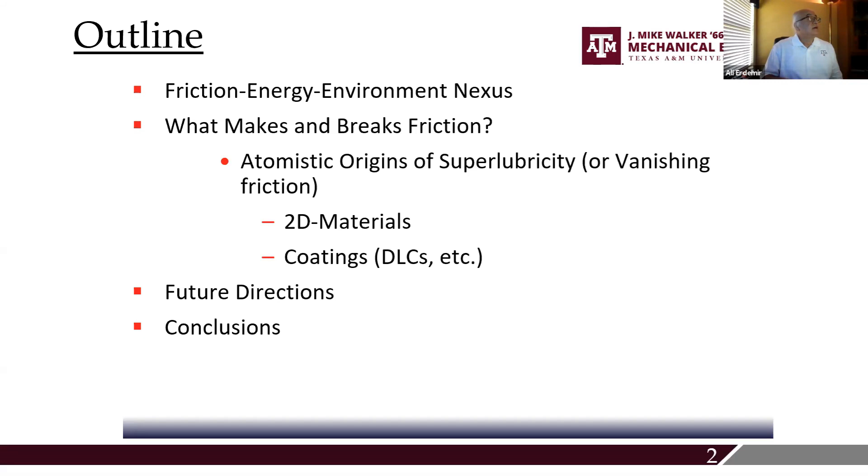So friction, as you all know, is known as resistance to sliding. And we feel it, we live with friction every day. We hardly make a big deal about it, but it's part of our daily life.

As I mentioned, despite being part of our life, it is one of the least understood physical phenomena. We are doing all we can with all these computational capabilities to understand the root causes of friction at atomistic level, and we are making progress. But have we actually fully understood it? I doubt so. It's going to be with us for quite a while longer.

And it is very important for safety, safe walking. A few weeks ago, we had a big snowstorm here down in Texas, and it crippled life, and everything almost came to a halt. It caused major damage. People fell down, actually fractured their legs. I have a friend at the university who had major surgery because of a fractured hip. So it's due to friction, or lack of it.

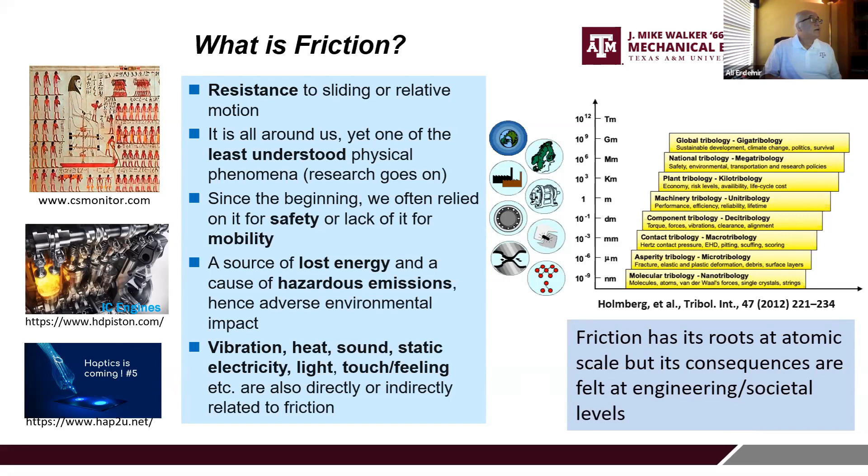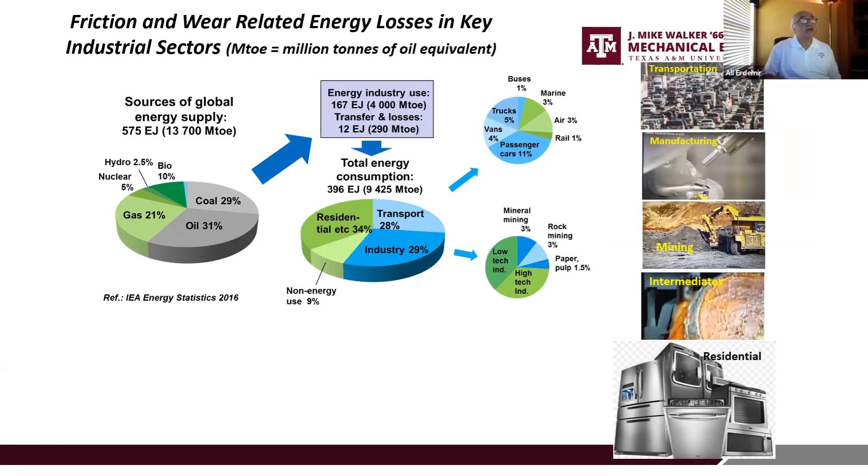If you go to the next slide, you will see that worldwide, we produce huge amounts of energy. We need it for our industrial activities and modern lifestyle. There are so many of them. And in every one of these, there are a lot of moving parts, as you can imagine. Some of these industrial activities shown here show the fact that there are a lot of moving parts, and in every one of these, there are frictional interfaces where energy is dissipated.

And with Professor Holmberg from VTT Finland, we tried to estimate how much energy is lost to friction in all these industrial activities. And it turns out that if you combine the portion that is due to wear and material loss, friction and wear almost consumes a quarter of the global energy output. And this is quite incredible.

And collectively, these two events actually also produce 8 gigatons of CO2 emissions. I think currently total CO2 emissions are about 44 gigatons or so. So it's almost proportional. It's quite a huge amount of CO2. And this has been actually going on for very long. This accumulates in the upper atmosphere, and then we create these greenhouse gas emissions, and then we have all these weather-related or environmental related issues.

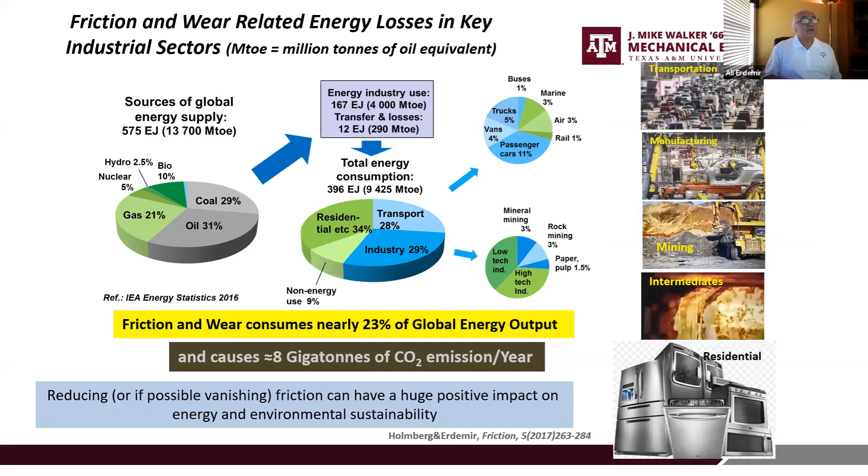There are a lot of good activities for clean energy resources, but these developments are unfortunately at a very slow pace. So if we look briefly at the situation with transportation vehicles, especially in this country, we have almost 300 million of these moving on our roads.

This way of transportation became extremely inefficient and very wasteful in terms of energy. We did a focused study with Professor Holmberg to see how much of the total energy from the fuel we put in our gas tank is actually used to move the car. It turns out that if you account for all the thermodynamic losses, air drag, and other factors, only about 20% of the total energy recovered from fuel is used to move the car. This is really unsustainable.

This had to change. Of course, nowadays there's a huge interest in switching to electric vehicles, and these are coming very strongly. Hopefully by the middle of this century, half of the vehicles on the road will be powered by electric vehicles, and I think that's a great thing.

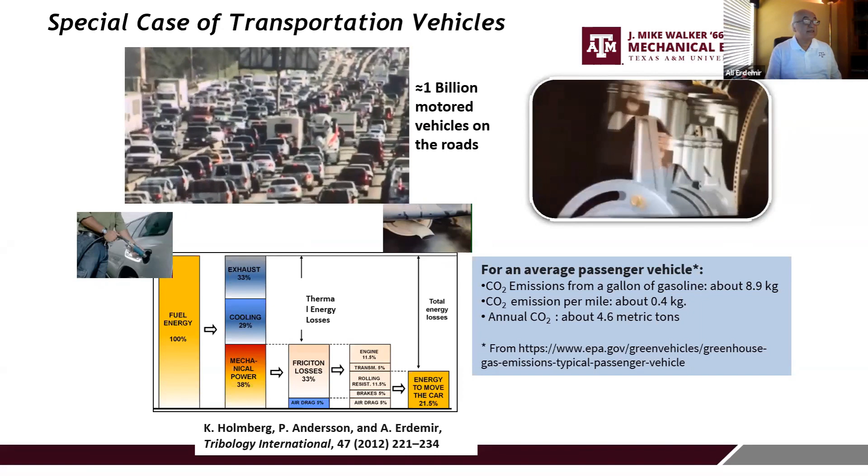In this country, every one of us, according to statistics from the EPA, drives a car and is culpable in terms of our carbon footprint. Every one of us produces almost 4.5 tons of CO2 annually. When you consider that we have over 1 billion motor vehicles, these are unbelievably high numbers. In this country we have a huge number of transportation vehicles, and collectively they are blamed for 28% of greenhouse gas emissions in 2018.

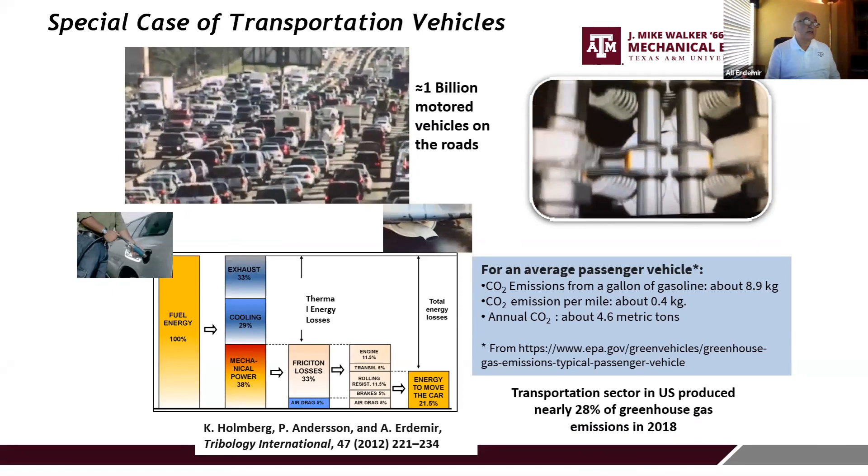So as I was saying, these numbers are not very good in terms of our future sustainability and future generations, and we have to do something about it.

With respect to electric vehicles, we did another study with Professor Holmberg which shows that if we switch to battery-powered electric vehicles, we can improve efficiency by 70%. Here we compare an internal combustion engine based vehicle versus a battery electric vehicle, and as you can see, the gain in efficiency is quite remarkable. I think this is the way to do it.

But in terms of their carbon footprint, there may not really be much difference. If we still get the power from fossil fuel burning power plants, the situation will not change. The only change is that we're shifting that carbon footprint to another source, as opposed to the cars or vehicles which at the moment are the main sources of these greenhouse gas emissions. It will instead be shifted to a coal-powered or natural gas-powered power plant. These are the kinds of things we have to be very mindful of.

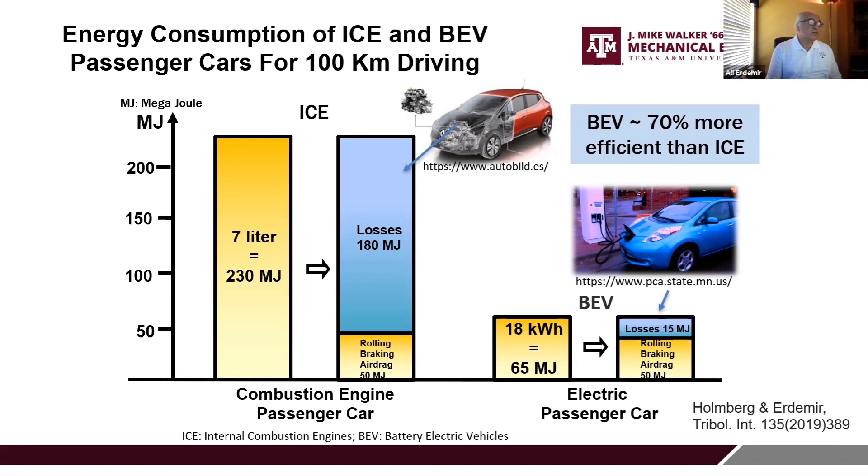So in general, if we can somehow switch to or develop technologies that will reduce frictional losses, that will have a huge impact on the environment, and also in terms of energy security and sustainability.

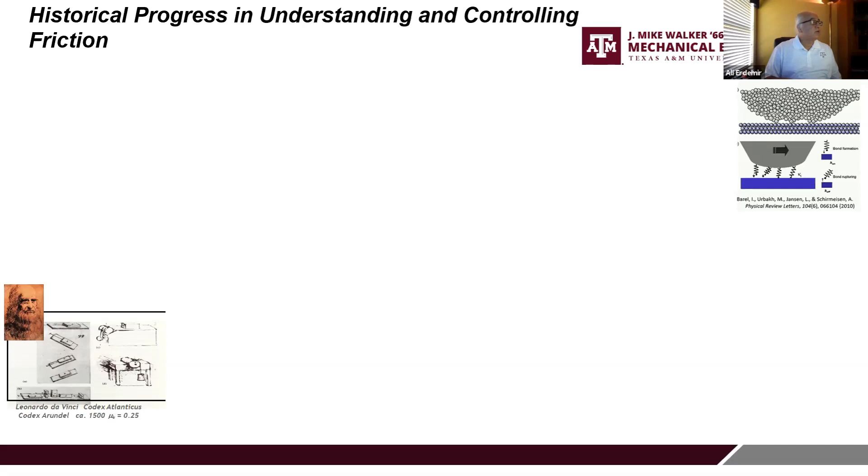Historically, if you look at how friction science and technology evolved over the years, we have come a very long way. The early scientific studies go back to the Middle Ages. Leonardo da Vinci was the master of these early studies, and he developed some very sound scientific principles that resonate even today. His experiments could be duplicated today, and you'd practically get the same results.

But since then, we have made remarkable progress, especially in the beginning of the last century, with atomic scale models by Tomlinson and Frenkel, and others who took their work further and came up with more realistic models in which the possibility of vanishing friction actually became possible.

Hirano and Sokoloff were two pioneers of these early studies, in which they developed the concept of commensurability versus incommensurability states of contact, which makes a huge difference in the frictional properties of two contacting surfaces, as I will mention later on.

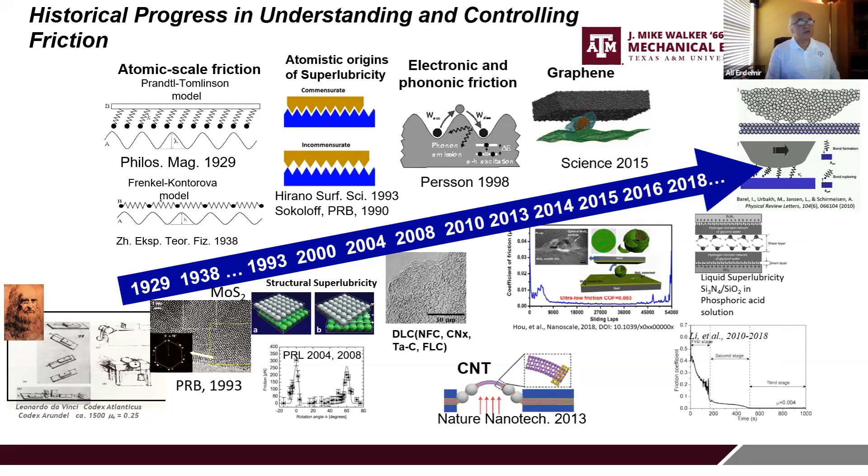Later on, we increased and enhanced our knowledge further, looking at the electronic and phononic dissipation, or the sources of friction. Based on that understanding, we came up with all these latest and greatest materials, especially 2D materials and surface modification technologies, which made it possible to actually achieve superlubricity, or nearly zero friction, at the interfaces of some sliding surfaces. This summarizes the progress in superlubricity for solid sliding surfaces.

So it looks like we have really come a long way. We all know that if we rub steel against itself or aluminum against itself, we get very high friction. If we sprinkle some boron nitride or graphite or PTFE like MoS2, friction actually comes down quite substantially. These layered or otherwise very slippery solids make that interface very slick, and thereby the friction actually comes down.

But since the beginning of 2000, there has been an explosion in these kinds of studies, perfecting these 2D materials in a more controllable manner. And thereby, under the right conditions, even seeing levels of friction down to 0.001. And these are quite remarkable. I think that shows us the way sliding interfaces can be engineered or lubricated to achieve extremely low friction coefficients. And from a more practical point of view, of course, liquid

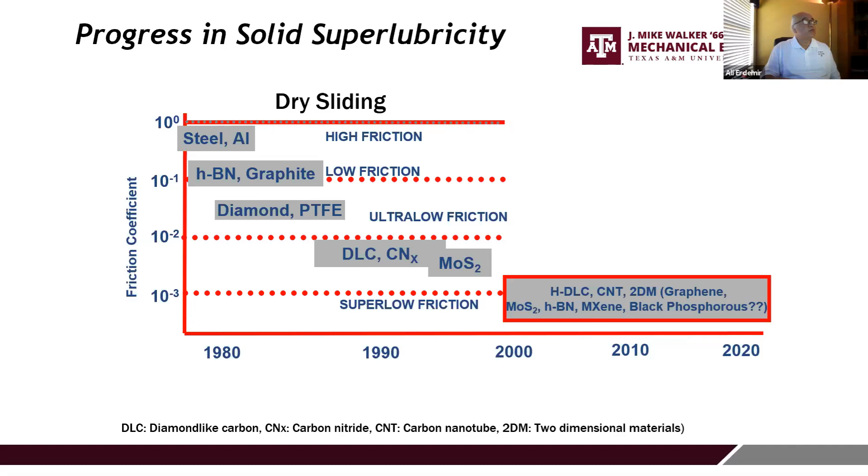superlubricity will be far more desirable. Not all liquids actually give low friction. If you apply water or alcohols to a sliding interface, you don't necessarily get low friction. But then you have all these base oils or synthetic lubricants like PAO or PAG. With the addition of these friction modifiers, the friction can actually come down. And there are special circumstances where water can actually be a marvelous lubricant for some certain ceramics, by virtue of some tribochemical interactions, where surfaces actually become extremely slick.

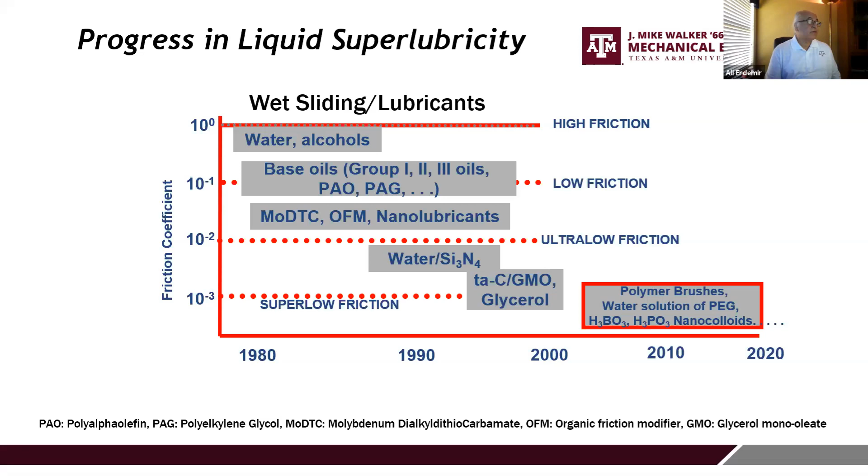And then we have all these other technologies related to polymer brushes, PEG, phosphoric acid, and some nanocolloidal systems. When present at sliding interfaces, these can also provide extremely low friction coefficients.

So let's look at the cases of 2D materials. These started toward the middle of the 2000s. There was a discovery of graphene, which really made a huge impact in so many ways. One of which, graphene was said to be one of the strongest materials. In fact, it was said to be 200 times stronger than steel. And it turns out that it has some other properties that will also have a huge positive impact in terms of their tribological properties. So we were one of the very first to actually start rubbing and scrubbing graphene.

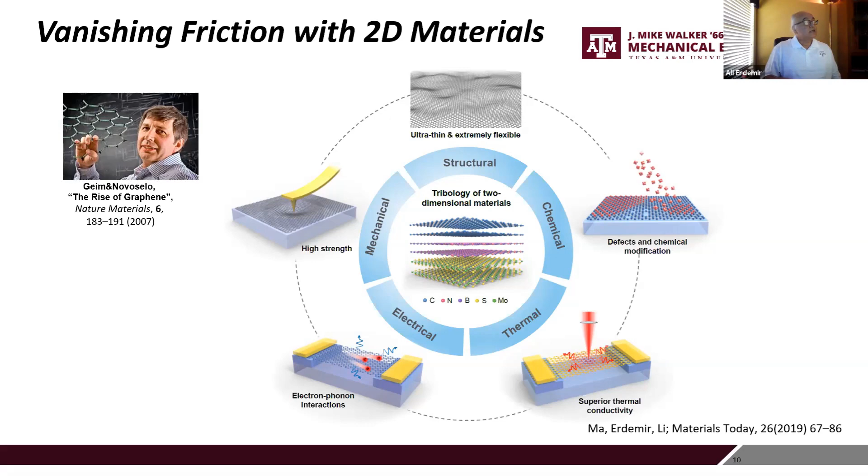And we published some very good papers, actually a number of papers, which showed indeed even one monolayer of graphene would provide very long wear life, despite having very high contact pressure. There was also the possibility of further functionalization of graphene to achieve nearly zero friction. We were not the only ones to get these kinds of results. Several other laboratories started working on these things, and under the right conditions, these surfaces could actually provide extremely low friction coefficients.

One of these conditions, as I mentioned earlier, relates to the commensurate or incommensurate state of contact. In the case of commensurate contact, you have two surfaces—they could be made out of the same material or similar, dissimilar material—and their atoms on the surface are in full registry. Because of this full registry, you have atomic scale, strong atomic scale interactions, and thereby you have what they call atomic locking. This will actually produce very huge interfacial adhesion, which will make these surfaces move with very difficulty.

And in the case of incommensurate state of contact, it turns out that if these surface atoms are twisted and brought out of that full registry, then you have this state of incommensurability. This would actually give rise to weak interatomic potential, and the energy loss and gain between these atoms will kind of cancel one another. In this particular case, you will actually have nearly zero friction.

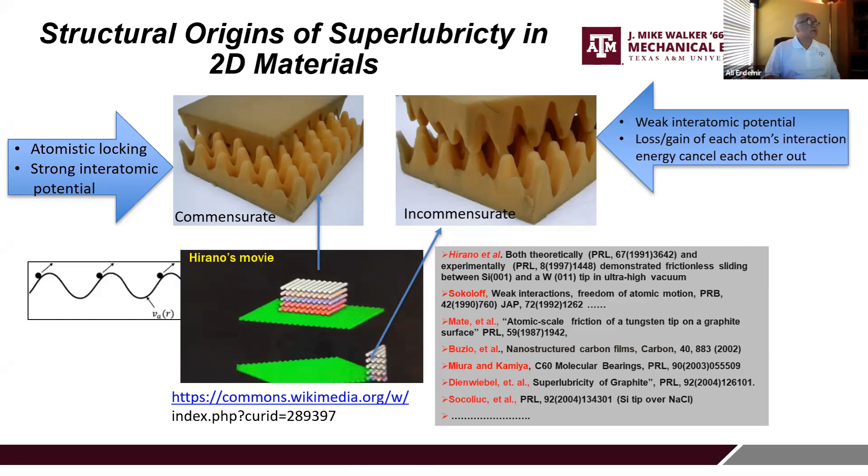of these sliding interfaces, that is, these are physically and structurally a very unique contact configuration. And this is most often referred to as structural superlubricity.

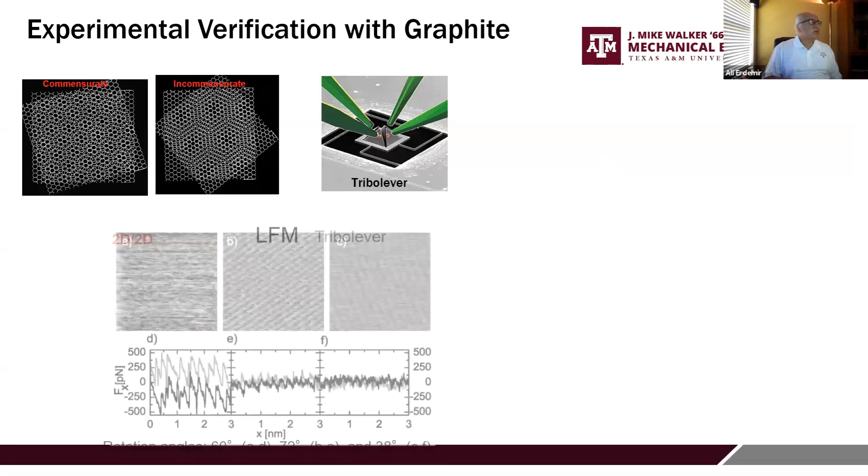One of the earliest verifications of this was from a group of scientists from the Netherlands, especially Frenken and his colleague in the Netherlands, who were able to test this model to see if indeed one can achieve zero friction. They used a nanoscale tribometer, which they call Tribolever, and attached a layer of graphite or graphene to the surface of the tip, rubbing this against, on the bottom, another highly oriented pyrolytic graphite. By twisting these two surfaces, these two pieces of graphite—one on the other side and also on the surface—

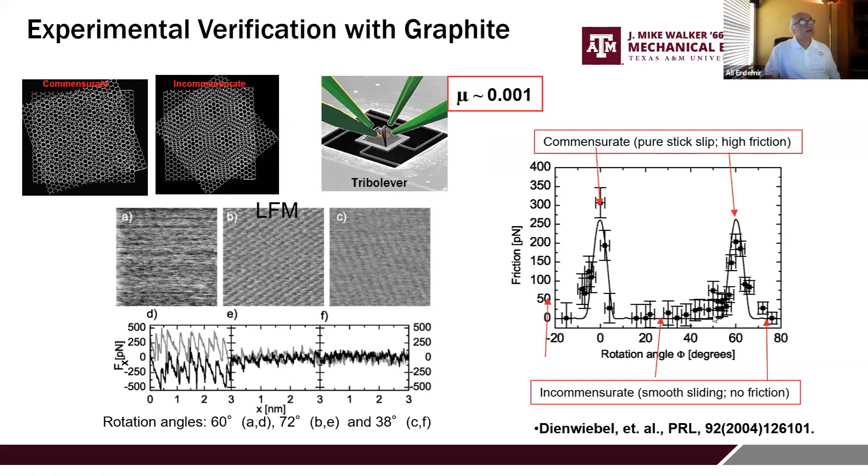they were able to see the situation where you would actually have very huge stick slip or adhesive interaction. By twisting it slowly, they were able to show that after reaching a certain twist angle, friction would nearly vanish. So this was a very interesting demonstration of the fact that commensurate or incommensurate states of contact are very important in terms of superlubricity and having very high friction or no friction at all.

And this effect was not limited to very conformal surfaces. It could also be achieved with graphene applied to a microsphere and rubbed against either graphene or graphite. You can see the difference in this article: in one case, a silicon dioxide microsphere against highly oriented pyrolytic graphite behaves with increasing load giving very high frictional force.

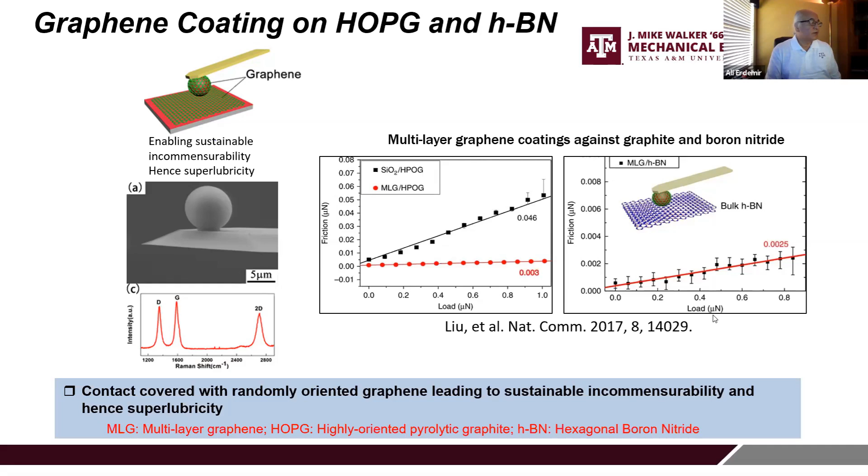But if you have a graphene coating on the microsphere, rubbing against the same kind of graphite surface, the friction almost vanishes. Doing the same experiments against hexagonal boron nitride also showed extremely low friction. These microspheres favor incommensurability, so you have only a few direct atom-to-atom registry or commensurate states, giving a favorable incommensurate state of contact and thereby extremely low friction coefficient.

Now, as I mentioned, we have done a lot of studies in this area. These works were with Diana Berman, now at the University of North Texas, and my colleague Ani Sumant, still at Argonne. We have seen extreme wear resistance of graphene.

These graphenes could be produced using the CVD method. Even one layer of graphene, under reasonably high contact pressure, could achieve over 6,000 sliding cycles of lifetime. If you build a few additional layers, that wear life would go all the way up to almost 50,000 cycles, which was quite remarkable.

Of course, these had to be done in a special environment - in this case, a hydrogen environment. Hydrogen seems to stabilize the broken surfaces of graphene. Under sliding contact, you might eventually wear through or fracture the graphene cage, but these broken edges are stabilized or neutralized by hydrogen, so they don't further disintegrate or participate in stick-slip behavior that triggers high friction and high wear.

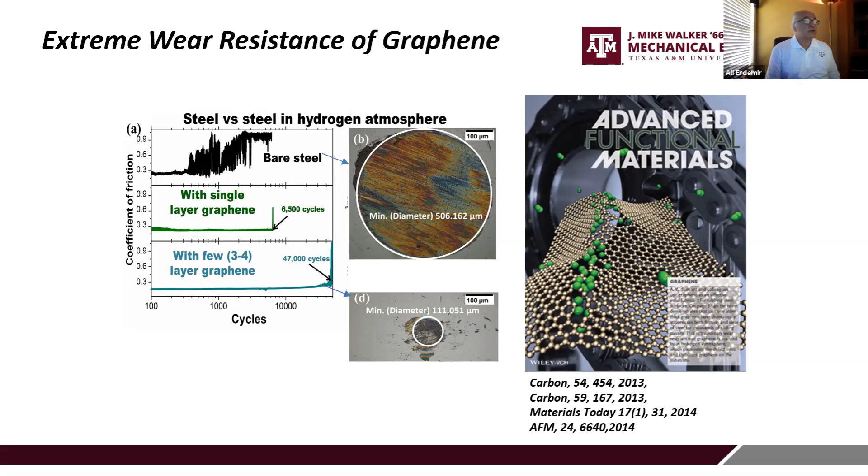In further studies, we have also seen that one can achieve superlubricity with graphene. These were discrete flakes of graphene sprinkled on a surface, combined with nanodiamond particles, typically 3 to 5 nanometers, rubbed against a DLC-coated ball. So we had carbon material in different forms - solid carbon on the ball side, plus graphene and nanodiamond. These combined carbon structures were able to bring the friction coefficient down to 0.004 level.

When we did very high resolution transmission electron microscopy of these surfaces, we noticed scroll-like formations with diamond nanoparticles right in the center. This gave us the impression that these nanoflakes were attaching to the surface of the nanodiamond, which makes perfect sense, since both edges and the surface of the nanodiamond have dangling bonds or covalent bonding possibilities. Once that happens, the rest of the graphene would scroll to form these rolls.

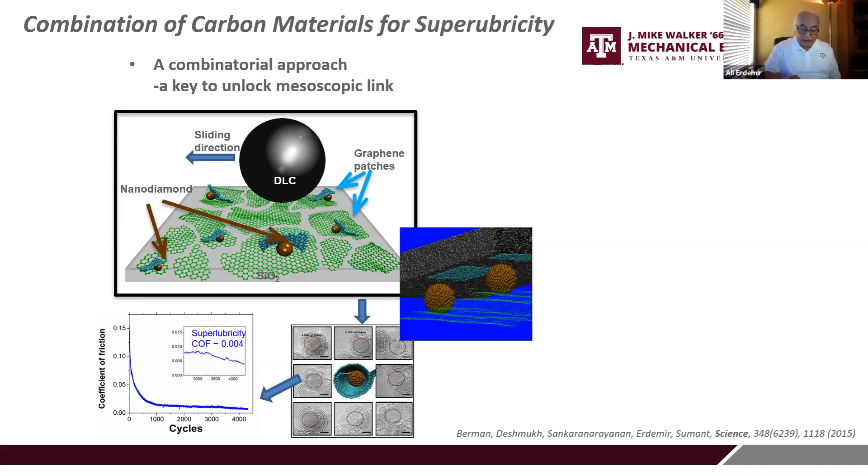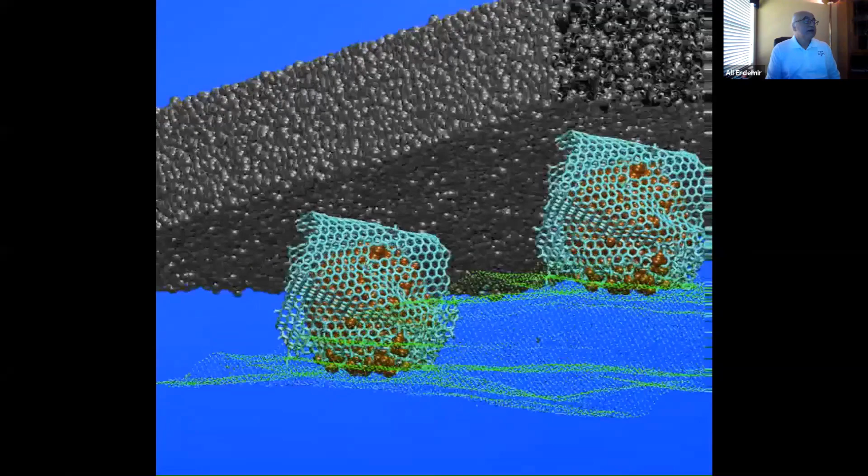This was also simulated using reactive MD simulation methods that show exactly how these nanoscrolls form. Once the nanoscroll forms, the severity of the nanodiamonds as an abrasive particle as well as adhesive particle has been diminished, so they became more benign, and they could also roll, in addition to having this amount of surface-to-surface interaction, or what we call an incommensurate state of contact type of situation.

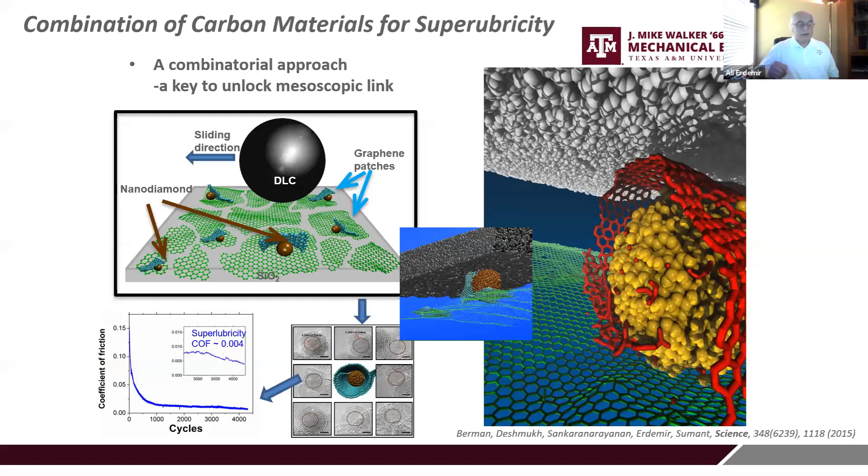There have been so many other studies that attest to the importance of structural superlubricity in one form or another. Graphene has been studied quite extensively. Other colleagues looked at MoS2 and other 2D materials, and so on. It was also found that even in nanotubes, a similar effect could be achieved by twisting the inner and outer shells of the tube and bringing them to incommensurate states of contact.

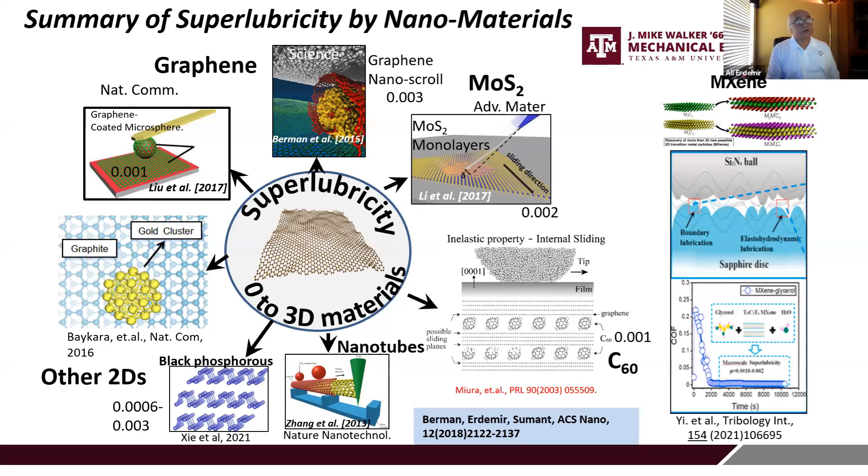There have been some other exciting developments quite recently. One relates to MXene, another 2D material, still emerging, with a lot of potential for industrial applications in the near future. These can be functionalized by some polar molecules or additives and added to lubricant, and in that case too, you can achieve extremely low friction coefficient. So this sounds very exciting in terms of large-scale industrial applications in the near future.

Another class of material that shows superlubricity is DiamondLike carbons. DiamondLike carbons come in different forms, and by and large they are amorphous in nature.

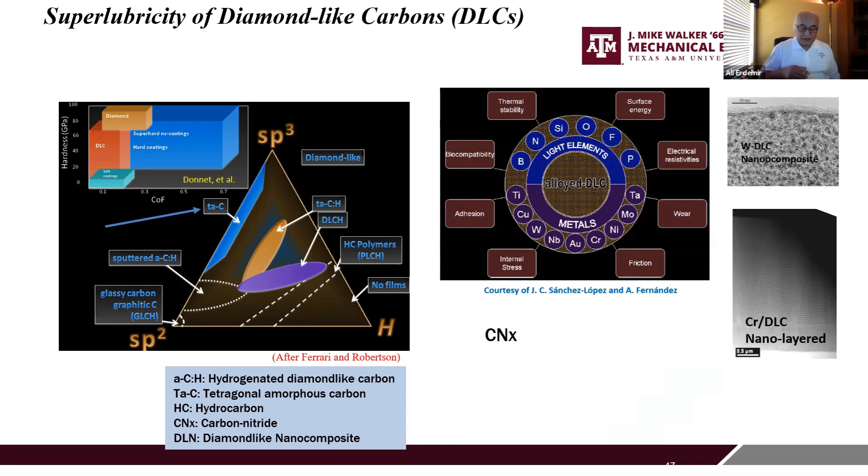Depending on the structure and chemical state, they could have, as shown in this diagram on the left, no hydrogen, mostly sp3 bonded carbon, or hydrogen incorporated into the structure. So they come in all kinds of chemistries as well as structural order. You can have diamond-like carbon with extremely sp3 bonded character.

These are almost similar to diamond in terms of friction and wear properties. You can also have mostly sp2 bonded carbon, similar to graphite. Then you can add hydrogen, mostly produced in a hydrogen-containing plasma environment, where the hydrogen incorporates into the structure, giving all these hydrogenated carbon variations.

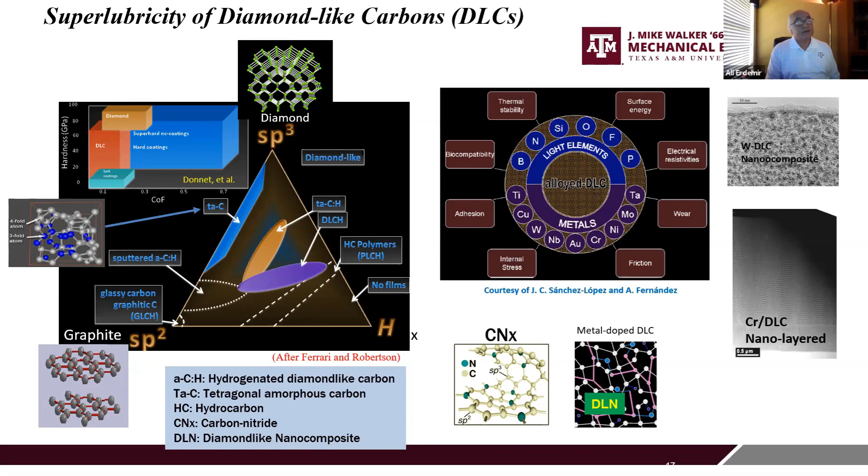You can also dope other metals and elements into these DLCs to achieve other physical and mechanical properties. CNx is a very important DLC film, and metal-doped DLCs are also important for industrial promise. Tungsten DLC is widely used in industrial applications, and you can also build these DLCs in nano-layer architectures.

From a superlubricity point of view, there have been many studies showing that with different types of alloying or doping, you can achieve superlubricity, with friction coefficients less than 0.01.

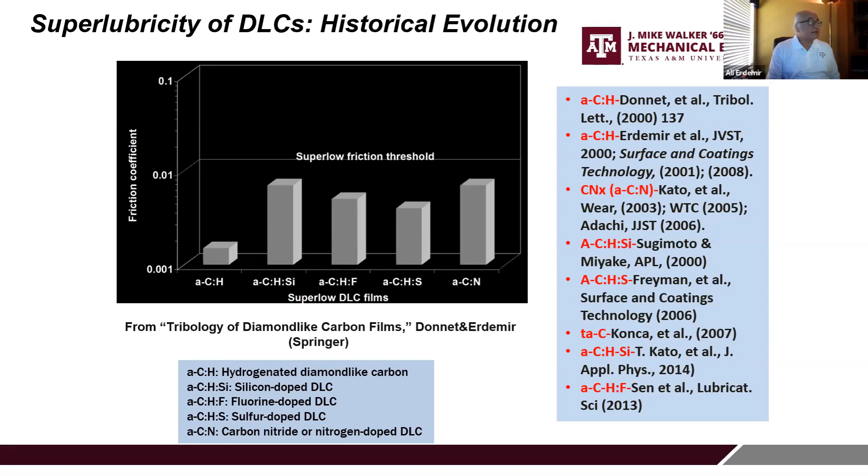In our studies, we concentrate mostly on amorphous hydrogenated carbon, on the left side of this diagram. Other colleagues looked at CNx, or silicon-doped DLCs, fluorinated DLCs, and even sulfur could be incorporated. In most of these cases, when they did friction studies, the friction turned out to be extremely low.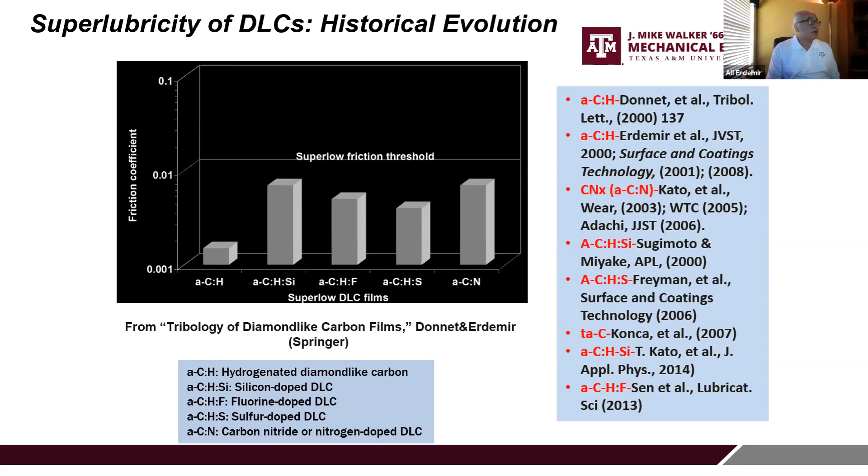In our case, we started our studies toward the end of the 80s, and we published one of the very first papers on DLC back in 1990.

We saw a very unique correlation between the amount of hydrogen we put in the DLC versus the friction coefficient. We further optimized this to achieve a unique chemical composition resulting from 25% methane and 75% hydrogen in the plasma environment. The DLC film grown in this plasma environment gave a friction coefficient down to the 0.001 level.

This was quite remarkable - we could measure this one test after another. Not only that, but we shared these films with colleagues from other laboratories to see if they could duplicate our results, and they all did. This was quite remarkable.

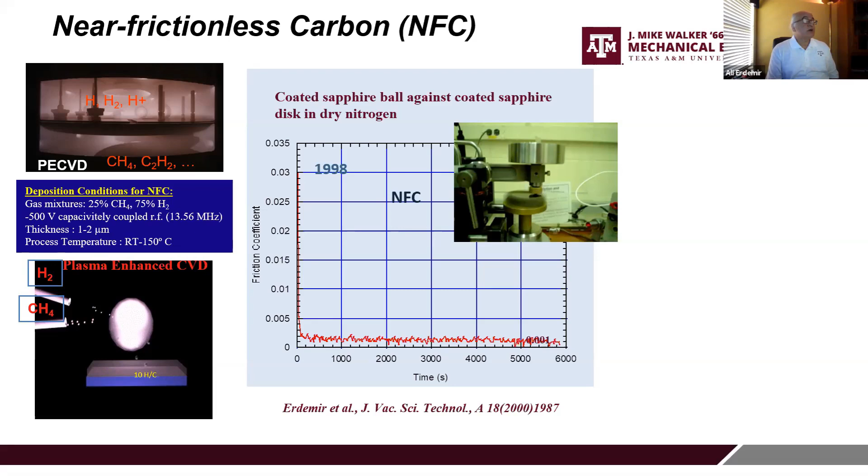If you look at this from a high school chemistry textbook level, when hydrogen loses its single electron to carbon, the nucleus becomes positively charged. So when you bring these two surfaces together, it will feel as if you are pressing two positively charged surfaces against one another, and these positively charged surfaces will trigger repulsive forces. Otherwise, these surfaces would develop adhesive forces, which would trigger high friction.

Here, you are doing the opposite, triggering high repulsive forces. We have done collaborative studies with several colleagues who looked into this using ab initio calculations and DFT and so on. In one case, they used diamond as a model system, since it could easily be simulated.

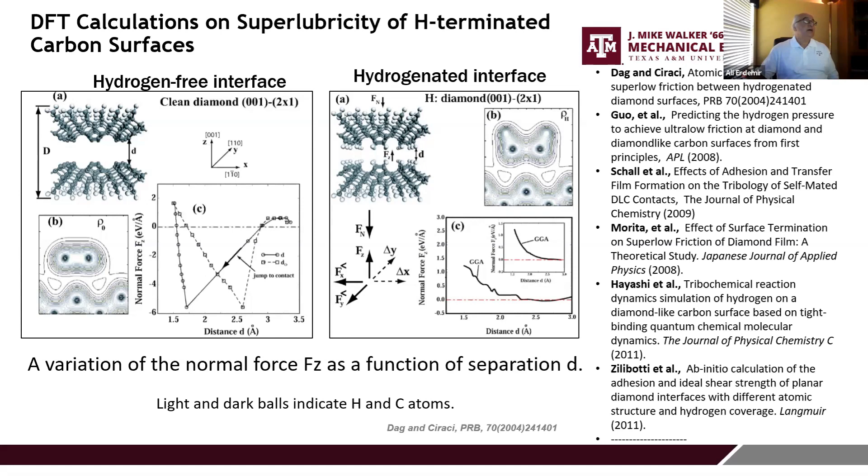So this kind of corroborated as to what made these highly hydrogenated carbon surfaces super lubricious, or providing this nearly frictionless sliding conditions. And of course, we did TOF-SIMS analysis of these surfaces after the test. The only thing we could see within the sliding wear track is that you only have carbon and hydrogen.

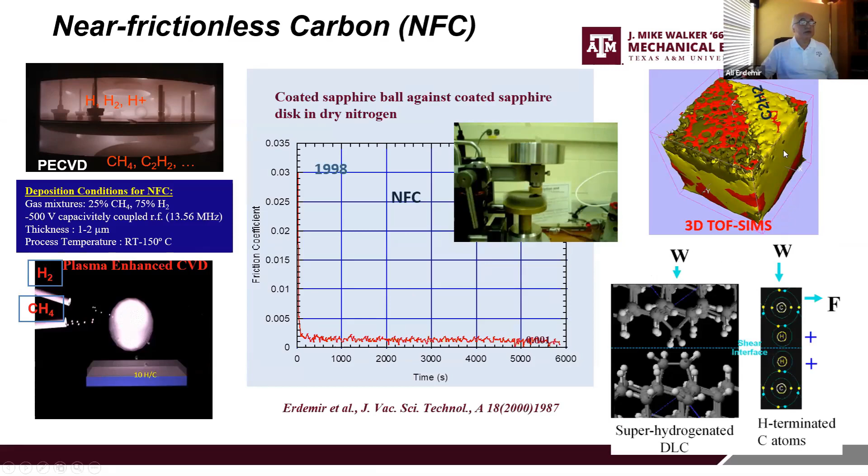As shown in these 3D TOF-SIMS maps. So to further prove our point, what we did was start with a hydrogen-free DLC. These are the kind of DLCs that you can directly sputter out of a carbon target in the absence of hydrogen. They are mostly sp2 or sp3 bonded carbon, but on the surface you may have some adsorbed species, and that's about it.

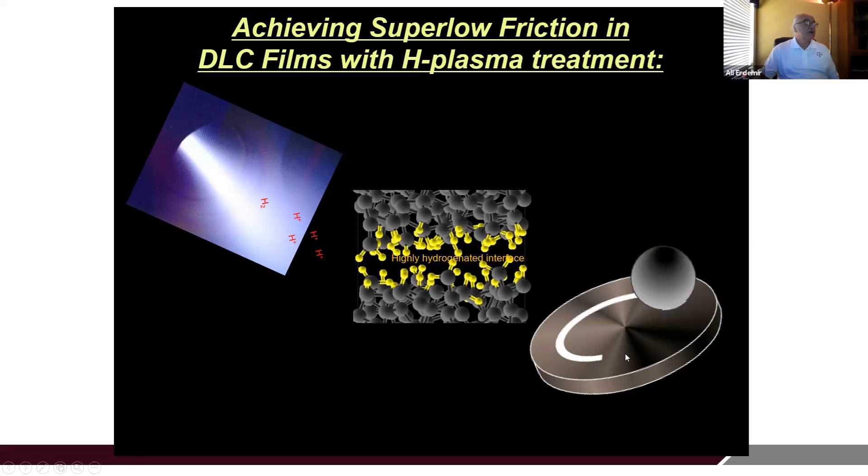Using an ion bombardment technique with ionized hydrogen atoms, bombarding these hydrogen-free carbon surfaces, we felt that if we could do this, these artificially hydrogenated carbon surfaces should also give superlubricity. So we did the experiment, and it was no surprise that the hydrogen-free or non-hydrogenated surface would fail after about 5 to 10 meters, with very high friction, typically going all the way up to 0.85 and higher. But after the surface is fully hydrogenated through this treatment or bombardment, it started giving this extremely low friction coefficient, as shown in the blue curve.

In fact, we could measure the friction coefficient down to 0.005. So hydrogen termination of these carbon surfaces, or these DLCs, turned out to be a very important mechanism to achieve superlubricity.

This also reflected very well on the wear of these materials. In the case of non-hydrogenated surfaces, the DLC film actually wore out very quickly. In the other case, the plasma hydrogen-treated surface, you could hardly see where the sliding had taken place. So extremely low friction coefficient also resulted in almost zero wear.

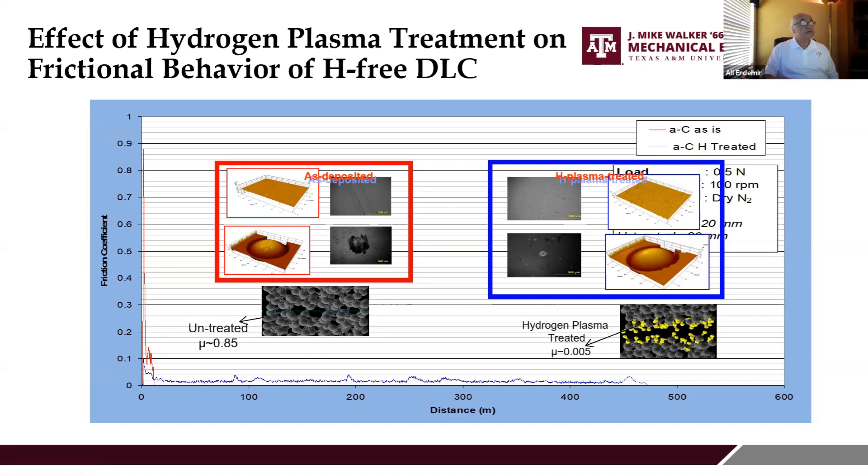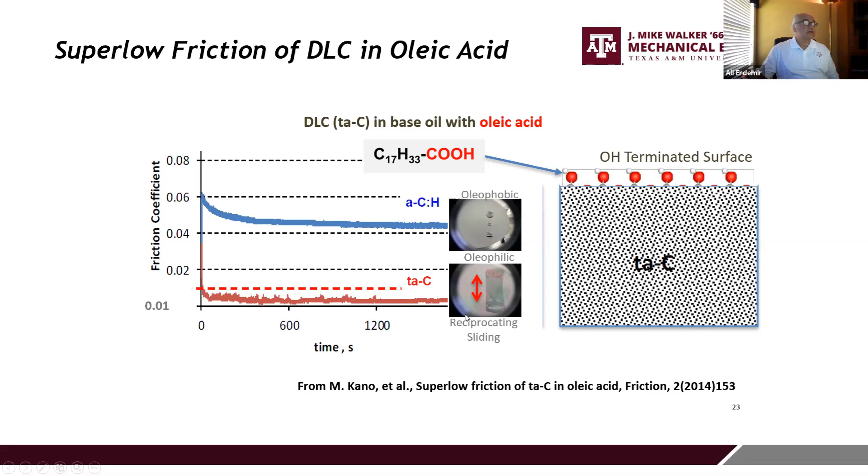Similar things could be achieved with these highly polar oil additives. One is oleic acid, a highly polar molecule. If you put it with a base oil on the surface of the DLC, whether hydrogenated or hydrogen-free, it tends to attach to the surface. With that attachment, the surface again gets terminated with something more benign and less chemically active, and with that you could achieve extremely low friction coefficient, as shown in the red curve at the bottom.

So in the case of DLC, it looked as if superlubricity has a lot to do with hydrogen termination of the top sliding surfaces. You can also terminate these surfaces with OH or oxygen, which are not shown here, but we also did tests run in pure hydroxyl ion or pure oxygen. The friction coefficient would be low, but not as low as with hydrogen, mainly because even these oxygen or hydroxyl terminated surfaces would have some polar activity and attraction, and their friction would be higher.

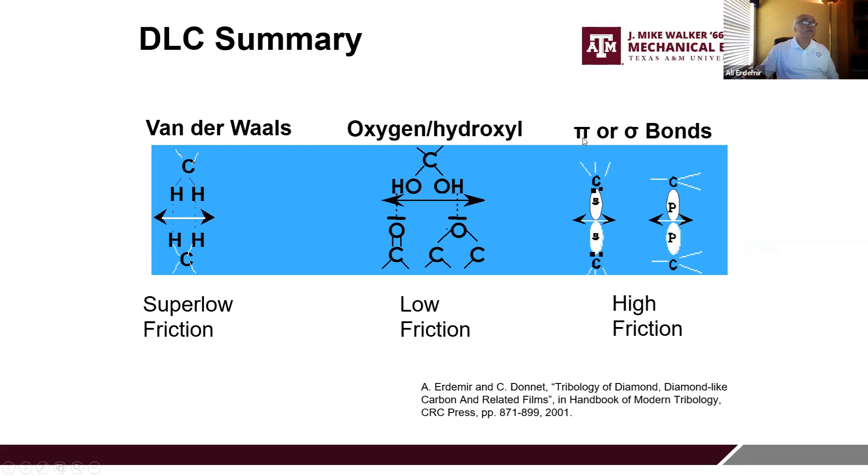If there's no hydrogen at the sliding contact interfaces, this will be very typical of tetrahedral amorphous carbon produced from a carbon target, either via pulsed laser deposition, PVD, or sputtering methods. Those surfaces will give you very high friction, mainly because of these pi and sigma bond, or covalent bond, interactions. So DLCs actually made a huge industrial impact.

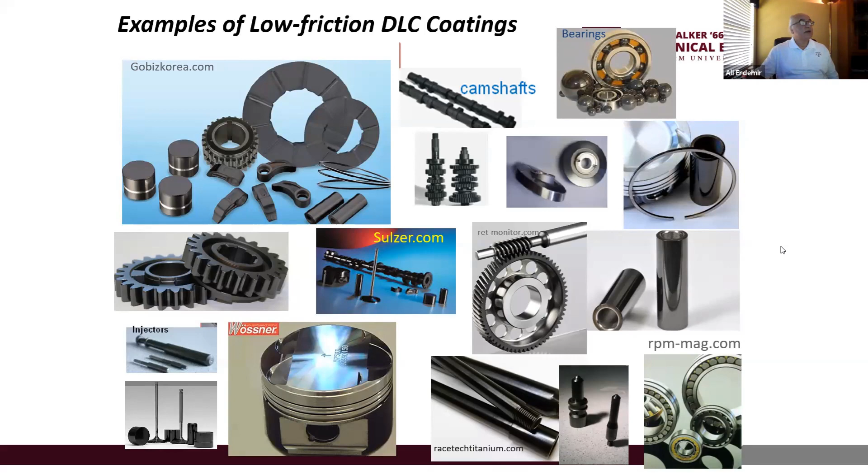They are used in all kinds of industrial applications. Some of them are summarized here, and quite recently we published a book that looks into all these latest and greatest coating technologies for vehicle applications with a friend from Hyundai company.

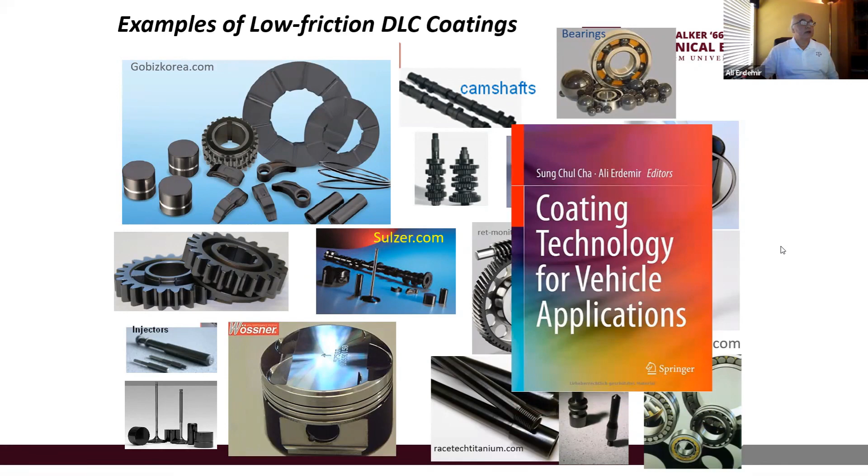So in terms of overall progress toward achieving macro-scale superlubricity and its application, from these very early ages where the Egyptians struggled to move huge colossi with hundreds of slaves, we have come a long way. We have done quite remarkably well in terms of understanding the origins of friction.

And with that understanding, we have developed new methodologies, new technologies, and new materials that can provide extremely low friction coefficients. And we are still working very hard. In fact, studies related to superlubricity have quite recently skyrocketed. I think in a given year, we now have hundreds of papers published on the subject.

With all these developments, I'm very hopeful that in the future, given another maybe 10 or 20 years, we might actually see some real tribological systems utilizing some of these technologies and achieving almost near-zero friction, while also consuming very little energy.

Especially if we can somehow figure out future electric vehicles, for example, consuming very little energy due to frictional dissipation or frictional energy losses, with that energy coming from the sun or wind or something like that. These vehicles will be totally green, and that will make a huge impact on the sustainability of our planet.

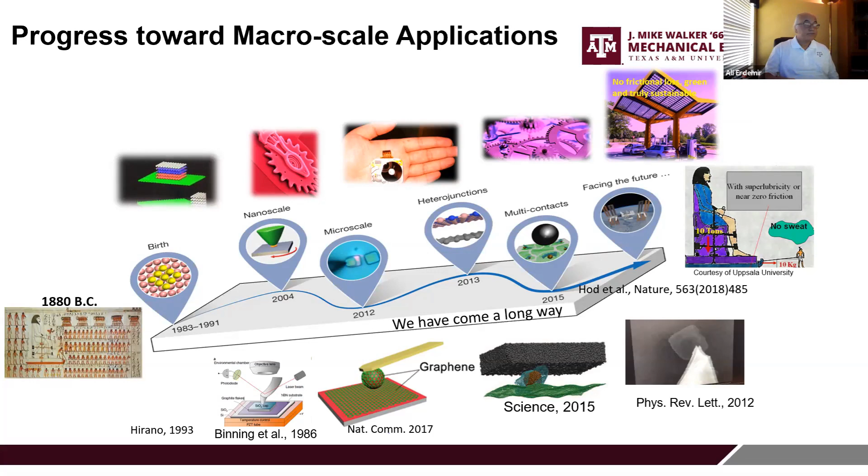So we have been very active in this area. We published a book back in 2007 on superlubricity, and since then we updated it—this was published a few months back. It contains a lot of new material I could not cover, but these topics are extensively covered in this new book for those interested in this topic.

So in summary, I think we have made great progress in the design of new and more exciting materials and coatings that can provide very low friction and wear. Especially these 2D materials have made a huge impact in terms of vanishing friction. DLC has been around, but there is still a lot of work going on in this area, and I think there might be additional new highlights or discoveries related to superlubricity and broader application possibilities.

In the case of 2D materials or crystalline materials, it looks like superlubricity is pretty much dependent on the incommensurability or the scroll formation mechanism that we discovered at Argonne National Laboratory. These are mostly for the 2D materials. For non-2D amorphous materials like DLC, I think the surface termination state of the material—especially with a gas or molecule like hydrogen—seems to be extremely important.

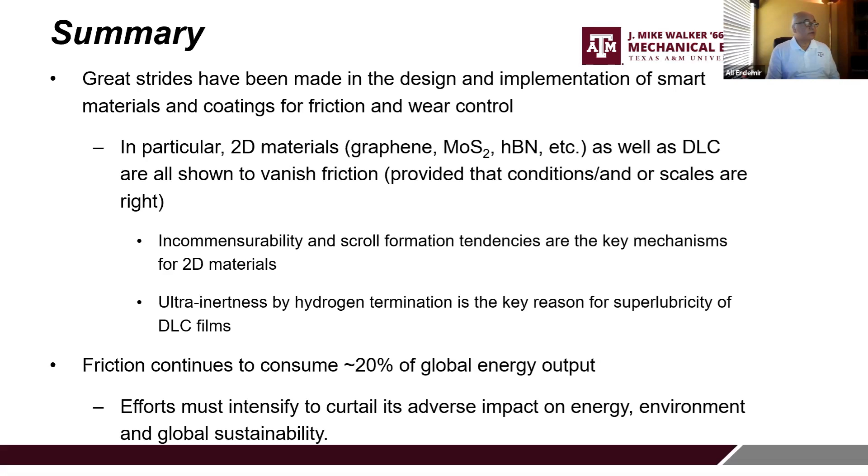And regardless of all these things, friction still continues to consume 20% of the global energy output, and this is, I think, proportional to the amount of CO2 released to the environment. So I think as tribologists, we have to really double our efforts to further reduce friction and thereby its adverse impact on energy, environment, and global sustainability.

So with that, I thank you all. I have had the great pleasure of working with a lot of great people. I must particularly acknowledge Professor Holmberg—we had multiple papers relating to friction, wear, and their impact on energy, environment, and sustainability. Much of my work at Argonne has been funded by the U.S. Department of Energy, and I'm very grateful for their generous support. I also had some of the very best scientists in my team inspire me and help me realize all these great studies that we published in multiple papers, and a lot of international collaborators who helped me with my work all along.

So with that, thank you very much, and if there are questions, I'll be more than happy to answer.